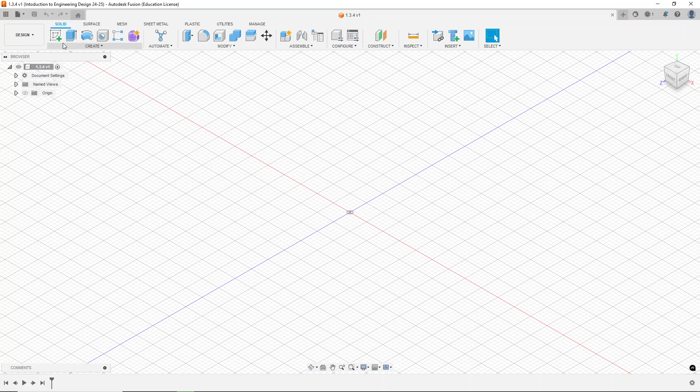So we're going to create a sketch. We're going to put this in the bottom plane, so the horizontal plane, and we're going to create a rectangle. There are three types of rectangle tool: the 2-point rectangle, where you pick the opposing points; the 3-point, where you pick all 3 points and then it builds a rectangle around that; or a center point rectangle. That's the one we're going to use today.

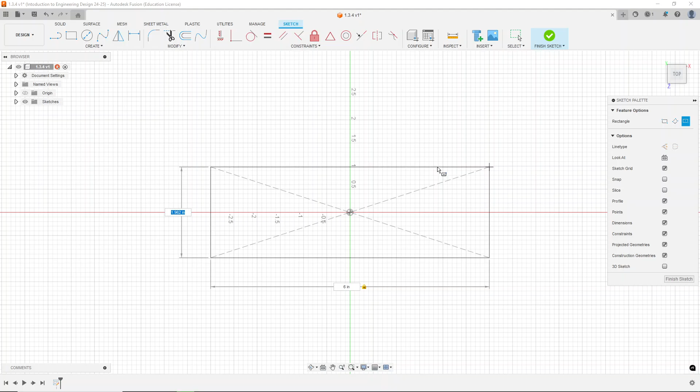So we're going to put the center point of our rectangle right on the origin, because that will lock down the rectangle. That's usually the best practice: you want your geometry to be touching the origin in some way, so it has a reference point. When you first start a sketch, there's only one locked-down reference point, and that is the origin, so we're going to make sure we use that. Your rectangle should be 6 inches wide and 4 inches tall. We can hit enter. Now we have a rectangle.

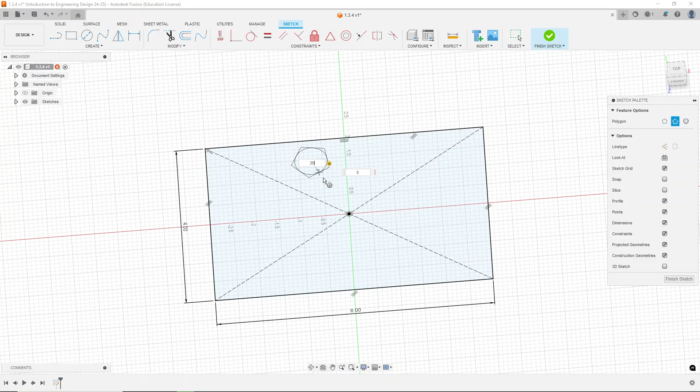We're going to add a few other polygons. So we're going to start with a circumscribed polygon. We've used this before with our hexagons from the last project, but now we're going to make some different versions. To begin with, we're going to make a pentagon. Remember that trick, hitting tab to go back and forth between these windows. We're going to make a pentagon that has a radius of 0.35 inches. So 5 sides at 0.35. We're going to create that pentagon.

Just create it somewhere in this top region, because later we're going to make it vertically constrained to this center point, so we want to make sure it stays up there. If we put that pentagon over here on the side, it would make it a horizontal constraint. So we'll just make sure it's over there for now. Next, we're going to create a polygon that is inscribed. We'll put that over here in the top right corner. We're going to give that a radius of 0.25, and we're going to let it keep 6 sides because we want to keep it a hexagon.

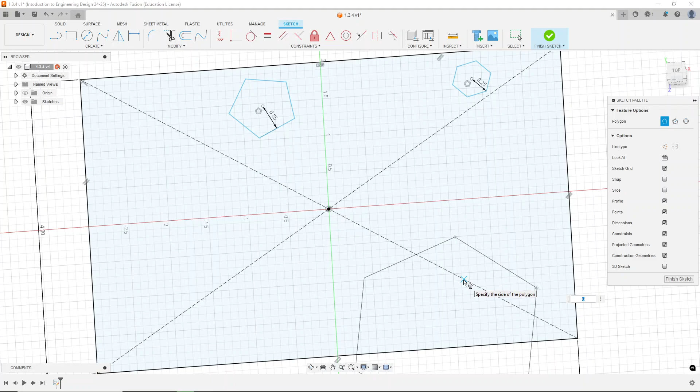And then finally, we're going to add an edge polygon. So we're going to make a triangle. This tool looks a bit different because we're starting with a line. We're going to get a line that is 1.25 inches long, hit enter, and all we've done is create a line. But as soon as we move our mouse cursor away, it starts to build a polygon and asks us how many sides. So I'm going to hit the number 3. That gives us a triangle. This is an equilateral triangle, which just means all 3 sides are the same length. So we have our 3 polygons and our rectangle.

So now we're going to start constraining them to put them where we want. If you notice, my mouse has a little icon on the bottom right because it still wants to make polygons. So I'm going to hit escape to get out of that, and now I can start adding constraints. I want the horizontal/vertical constraint, which is up here. I'm going to hit the center point of my pentagon and the center point of the rectangle. Now that pentagon is locked so that it is exactly vertical of the center point of the rectangle. Next, I'm going to add a horizontal constraint on one of these lines. So now this line must stay horizontal.

And then I'm going to hit the letter D to add a dimension, or you can go over to create and hit sketch dimension. I'm going to grab that horizontal line I just constrained, and I'm going to grab the center point of the rectangle, and pull it over here to the side. Now I want this to be 0.5 inches. That means this horizontal piece of the pentagon must be 0.5 inches away from the center of this rectangle.

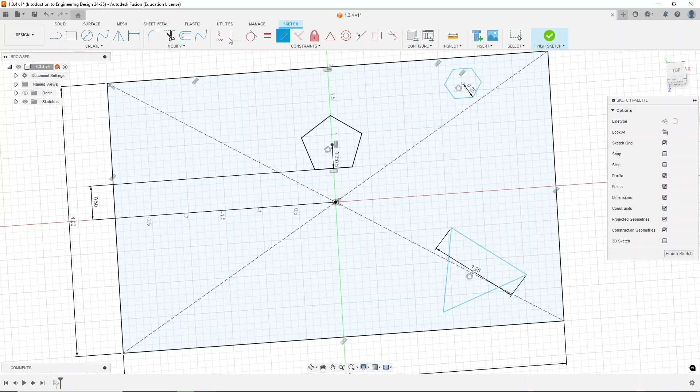Now to start constraining the hexagon, we're going to start with a parallel constraint. We're going to take one of these sides and make it parallel to the top edge or the bottom edge of the rectangle, the 6-inch length. So now that side is parallel with the 6-inch side of the rectangle. We're going to add a coincident constraint. We're going to make the center point of this hexagon coincident with this line.

And now we're going to add, by hitting D, another constraint from the center point of that hexagon to this edge. And we're going to say this needs to be 0.5 inches as well. So now that hexagon gets pulled up into the side.

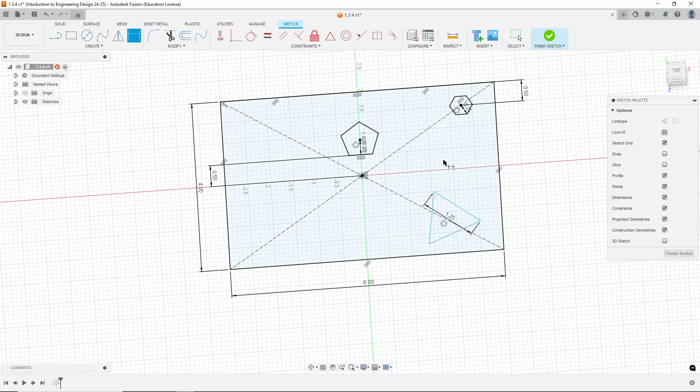Finally, we're going to constrain this triangle. So we're going to add a coincident constraint at the tip. Just be careful, make sure you get that little white dot. So we pick the tip of this triangle and then the tip of the rectangle. So those are now coincident. And then we're also going to add a coincident constraint with the center of the triangle and this dotted line.

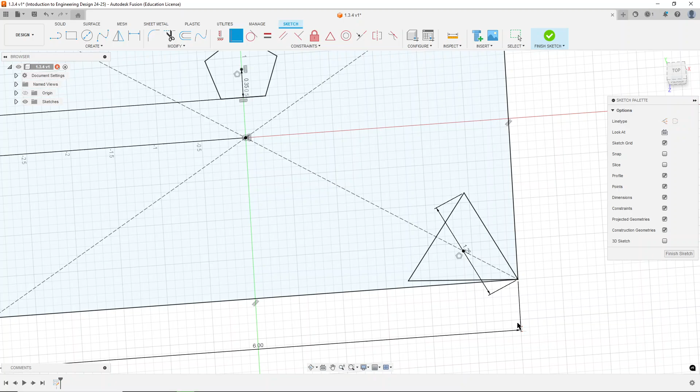So now looking at this sketch, you should get in the habit of looking for these black lines, because this tells you that your sketch is fully constrained, which just means if I hit escape to get out of my tools, if I try to drag any of these lines, they're staying where they should be, which is good. So when I start to mess with other numbers later on, it's not going to affect the placement of these objects.

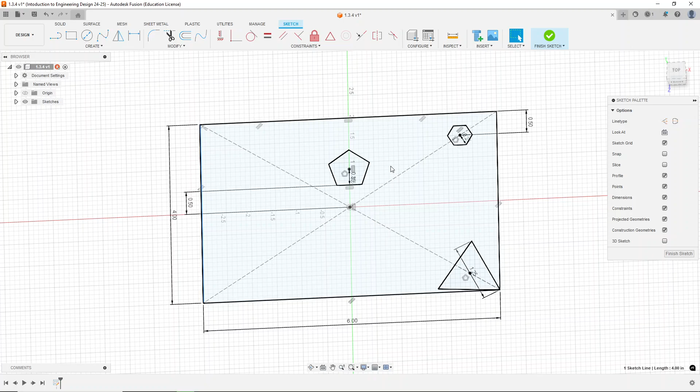So continuing on, we're going to start adding some more patterns. We're going to use some new tools. So some of those tools, if we go here to this create section, we have circular patterns and we have rectangular patterns. So to begin with, we're going to create a circular pattern of our pentagon. So we hit the circular pattern tool, and now we get this new palette up here. We're selecting our object, so we're going to drag and drop over all of our pentagon.

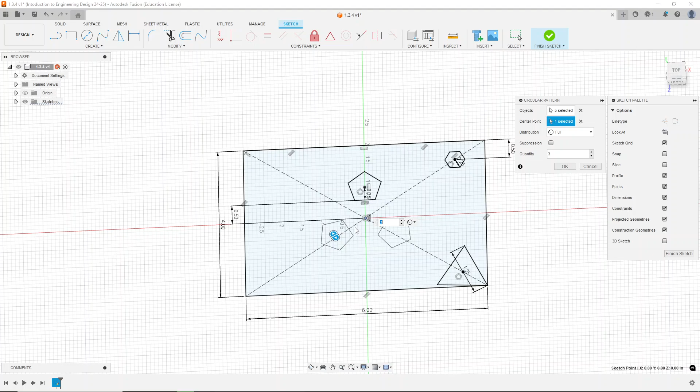Alternatively, I could go through and just click each of the 5 lines of our pentagon. After I do that, I'm going to hit over here. So now I get to select the center point of my pattern. So I want it to be the center point of this rectangle. So it automatically gives us a pattern with 3 pentagons. I want 5 pentagons though. So once we do that, hit OK. Now we have 5 pentagons that have rotated around that center point of our rectangle.

Next, we're going to create a rectangular pattern. I'm going to select our hexagon, and then we get a couple different numbers we can put in. We're going to go from extent to spacing, and rather than selecting our directions, right now we have these 2 arrows. If we start to drag either of these arrows, you can see how we start to space out some additional hexagons. We're going to call this at -0.7. That looks like a good number, and we can leave it at 3.

Now, if we grab this other arrow and drag it down, we start to get more hexagons. I don't quite want 3. I want to just do 2 rows of hexagons. So now we have 6 hexagons in this position. And if you look at the window over here with our rectangular pattern palette, we have those directions, and we can say symmetric, and that would split it up evenly on both sides. We're going to stick with one direction though.

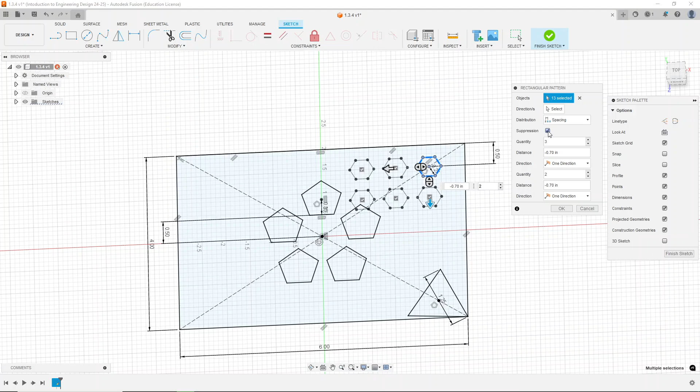So we have our set down here, quantity, distance, and direction. Those are our hexagons going down. And then our quantity, distance, and direction, these are our hexagons going to the left. If you look though, one of these hexagons is overlapping with the pentagon, and I don't want that. So I'm going to hit suppression, and then we get these little check boxes that pop up on all these hexagons. I'm going to click this one, and that means that hexagon is not going to be created in this pattern. So now I can hit OK. And now I've created 5 hexagons in this pattern.

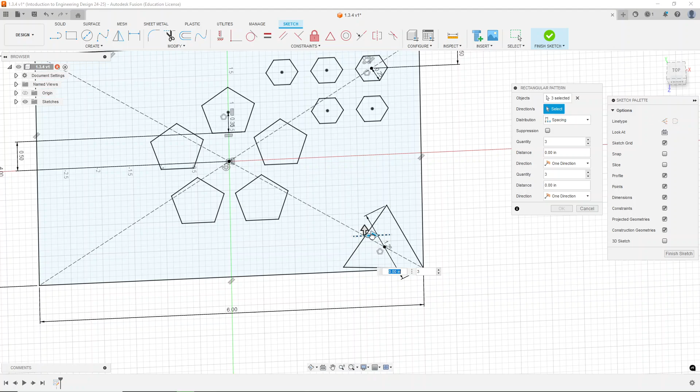Finally, I'm going to create another rectangular pattern for this triangle. So I'm going to select all 3 sides of the triangle. You see object selected, I have 3, each of the 3 sides. For directions, rather than doing the left and up like we just did, I'm going to choose this line, and I'll get rid of that direction. So now we're going to go along this line. I want 7 triangles, and let's just bring these down enough.

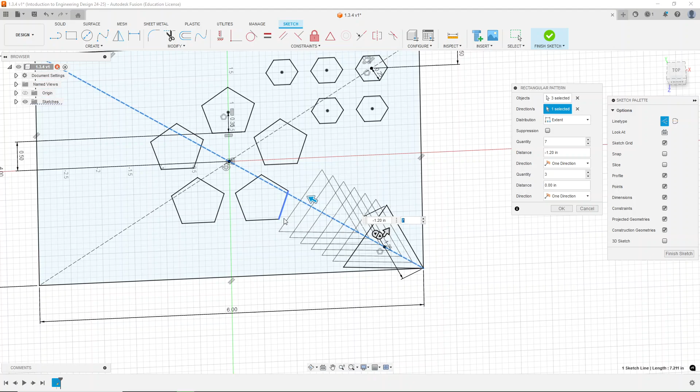We'll go to extent. So now the difference between extent and spacing, for extent, I'm just telling it how far out the triangles are going to go, and then it's going to space out however many I tell it to put in there. If I go to spacing, I'm telling it how much distance should be between each of these triangles. So we'll go with extent for this one, and I'm just going to pull it back just enough so that it doesn't overlap with that pentagon we have in the middle. So let's do -1.20 inches for those 7 triangles. So now we have our patterns up here, and we're going to finish our sketch at this point.

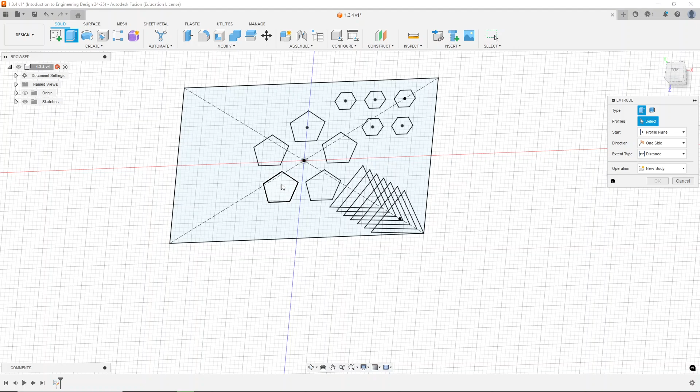From here, with our sketch up, we're going to create an extrusion. There are a lot of different sketches we can choose from, but first we're going to choose the rectangular base in general. We're going to grab that, and then we're going to grab a few sections of these triangles. So I think we take this first triangle, and then we're going to alternate with these others. So we create this kind of arrow-like shape.

So now we have these 3 cutouts that remain from our triangles, along with our 5 hexagons and our 5 pentagons. So let's extrude that. Let's go 0.2 inches. Seems like an appropriate depth.

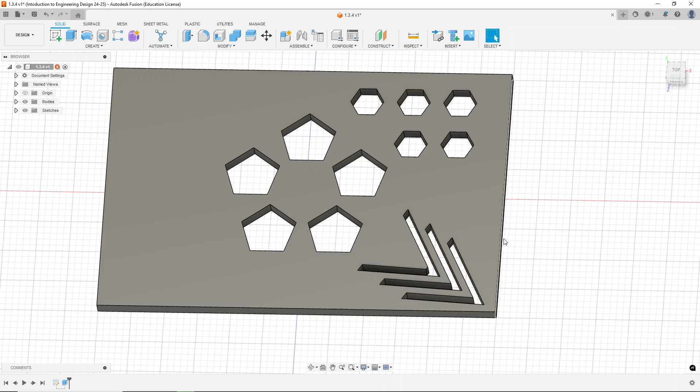And just like before, anytime you use a sketch to create an extrusion, your sketch disappears. But if we hit this drop-down arrow, we can hit the eyeball, and then our sketch comes back underneath, and we can use that to build on later if we need to. For our purposes, though, we're going to create a new sketch, so I can hide that sketch since we don't want it to confuse our geometry right now.

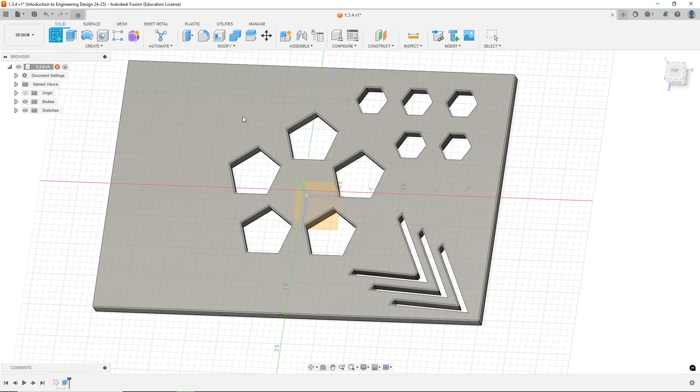We're going to create a sketch on the top surface of this thing we just created. So don't choose the orange squares right now. We want to choose the surface of this object we just made, because when we do that, we get the lines that are in this object as part of our sketch geometry.

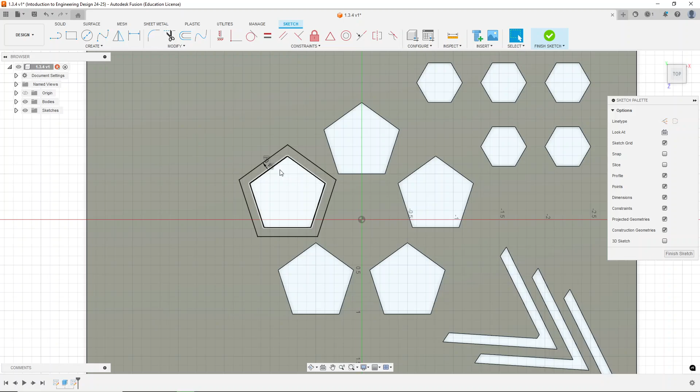So now we're going to create an offset and choose 3 pentagons. I don't care which 3 you choose. I'm going to start with this left one, and I'm going to create an offset that is negative 0.1 inches. You see it creates a line that is just offset from the hexagon or the pentagon that already exists. So I'll do another one over here, negative 0.1, and I'll do this one down here, negative 0.1.

Now looking at our pentagons and our offsets, some of these interact with one another, and we don't want that to happen. So now I'm going to go to modify, and we have this fillet command. So we're going to create some fillets. And if I put my mouse cursor right on the tip of a point where I get that white dot, it gives me the projected fillet. If I choose a line, it's going to wait for me to pick the other line to fillet. So any 2 connected lines, you can create a fillet, or you can just choose the point that you're wanting to fillet. So I'm going to choose this point.

I'm going to give it a 0.2 inch fillet. I'm going to hit enter, and I'm going to continue doing that for all of the points on all 3 of my offsets. So fillet tool, pick the point, 0.2 is our radius for our fillet, and then repeat for each of these 15 points.

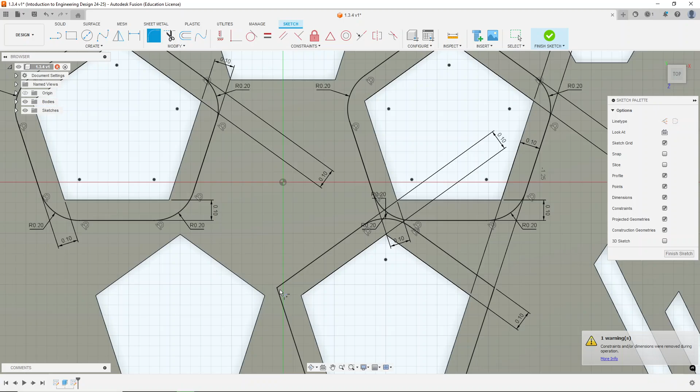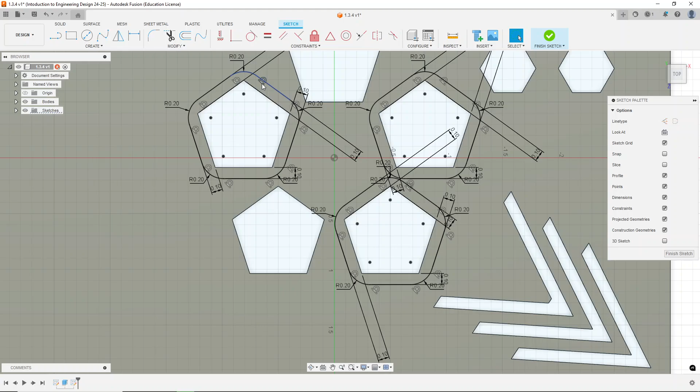Something that you can do as well, if you just right click, there's the repeat fillet button. So rather than going to find it each time, you could do that. So if I right click, repeat fillet, I can grab that fillet tool right away. Perfect. So now I have fillets on all of my 15 corners of the pentagons I just created, and I no longer have them intersecting. That was really tedious.

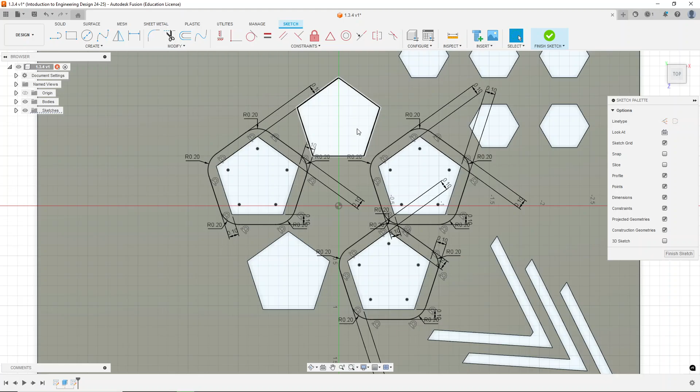One way we could have made this happen that might have been a little bit easier is if we just did one of these pentagons, and then we could have created a circular pattern to bring them around, and we could have suppressed the ones we didn't like. So just know in Fusion, there's always multiple ways to get things done. The way I'm showing you doesn't have to be the best or only way. It's just how you're going to get there. In this case, this is probably the longer route.

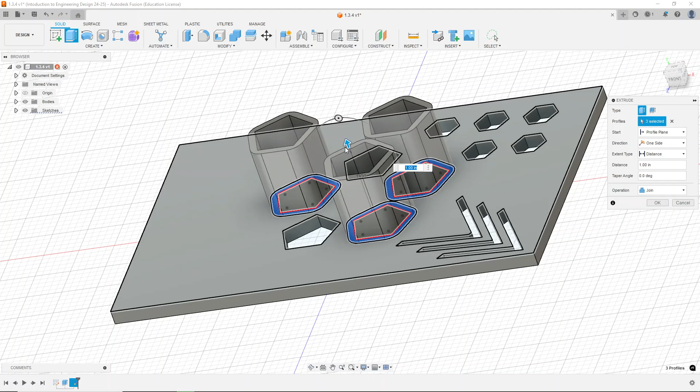But at this point, we can finish our sketch. And now we're going to extrude these regions we have just created. We're going to pull those up. Let's pull them up 1 inch, hit enter, and now we have this odd shape that we've just created for our first part of 1, 3, 4.

To continue for the second part of 1, 3, 4, I'm going to open up my bodies. I'm going to hide this body so we don't have to look at it for the next piece we're going to build in this section.

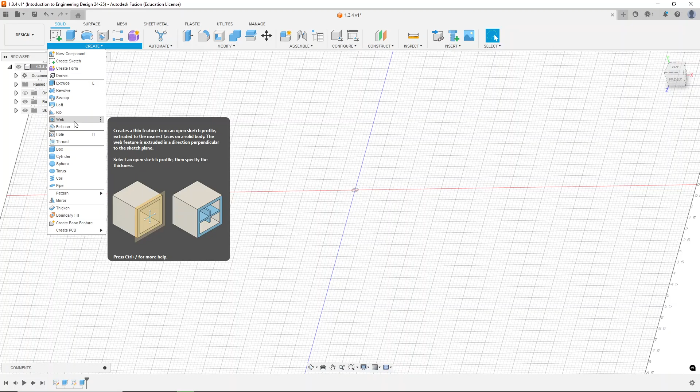In 3D printing, an additive manufacturing process, we're not concerned as much with it leaving a mold, so we have different things we would be worried about. So we'll talk more about that as we go through this process. But for now, we'll go back into Fusion. We are going to start by creating a polygon. Oh, nope, sorry, I guess we need to start with the sketch first. So we'll do that again on the horizontal plane.

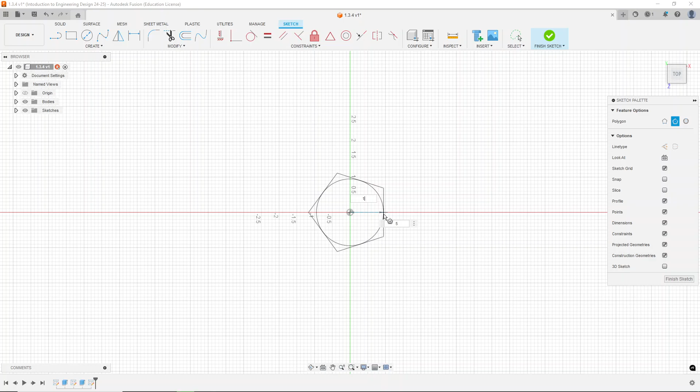We're going to create our polygon, and we want a circumscribed polygon. So we're going to put it at the origin again, hit tab. I want this to be 5 sides because we're making that 5-sided tool holder. And then I think this was about 2 inches in diameter, so I'm going to give it a 1-inch radius and hit enter. So now this is going to be our base. So we'll finish our sketch.

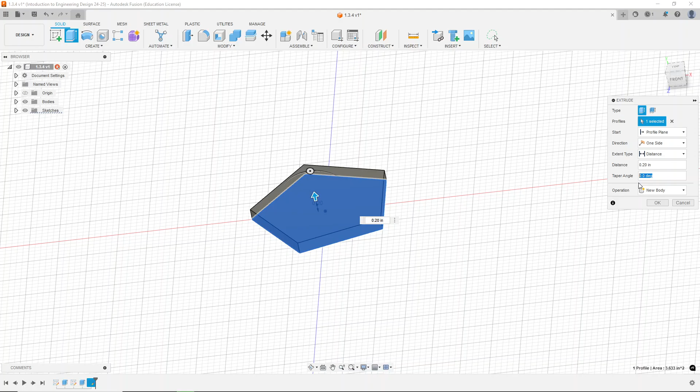We're going to hit extrude. We're going to pull that up. Let's do 0.2 inches. And then we have this thing called a taper angle. So we could do this all right now by introducing a taper angle. So if we put this in at -45, you can see it tapers that object inward. So we start to build in. If we leave that at 0 though, it would just make our regular pentagon.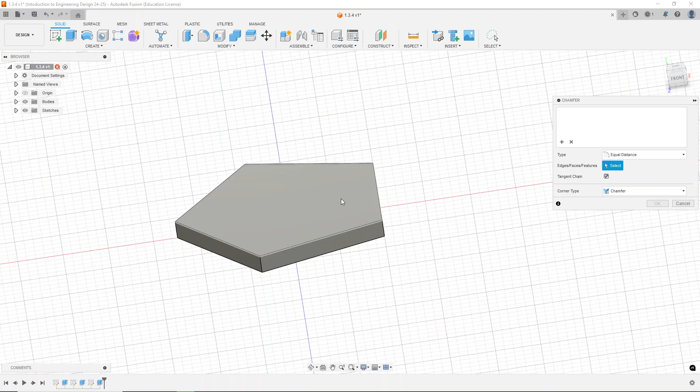So you could just do the -45 and hit enter, but I'll show you a way you can do that without. Again, there's multiple ways to get things done. So I could just make my pentagon shape, and I could hit chamfer, hit this top surface, and then now I have a distance of 0.2 inches, and I would get the same object in the end. Either way you do it, you're going to get the same object. It's just about how you're using the tools or what pathway you want to take.

Now from here, I'm going to extrude again without making a sketch, and I'm just going to choose this profile, and we're going to pull it up some distance that makes sense. So in order to help me make sense of how tall this should be, I'm going to take a pause. I'm going to bring in a canvas so we can reference. So I brought a canvas in, which is the picture from our notes, but you can also just reference with your iPad if you need to.

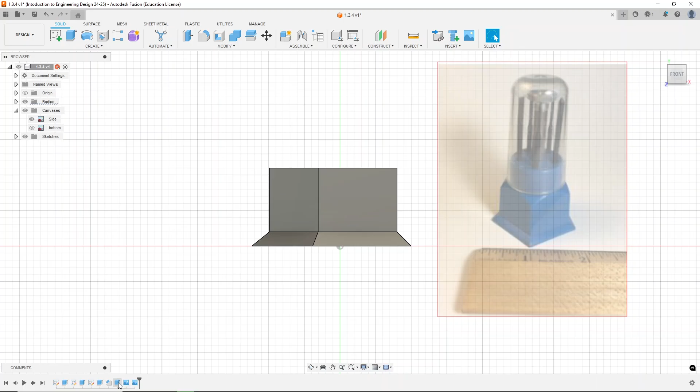But I messed up my second extrusion, so I'm going to go here and click that, right click and hit edit feature. So this is where you should be at. We're bringing up that section. I think 0.9 is actually a good height, but we need to add a taper to this as well. So we're going to say -5. That seems a bit steep, so maybe a -2 degree taper. So a negative taper just means it's smaller at the top.

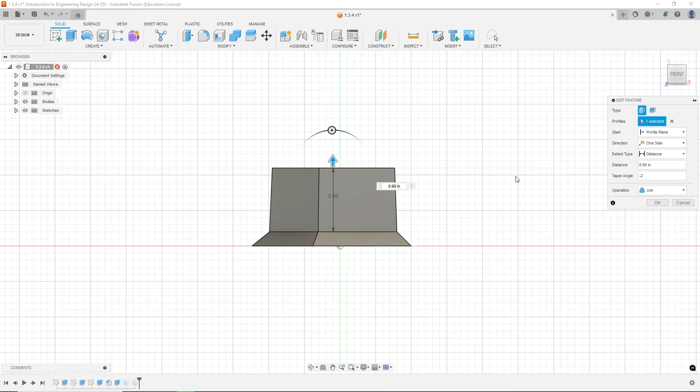I'm at OK. So now we have this taper going upward. Again, because it's injection molded, that just means everything needs to be tapered to the top so they can leave the mold easily. So now we have this part at the top, and we're trying to get it to eventually become a circle. So we have a 5-sided shape, and we're trying to turn it into a circle. That can be really complicated if we're trying to do it by hand, but luckily there's some tools to make that easy.

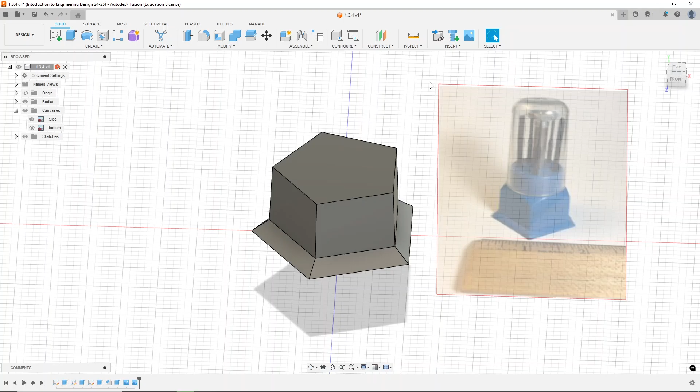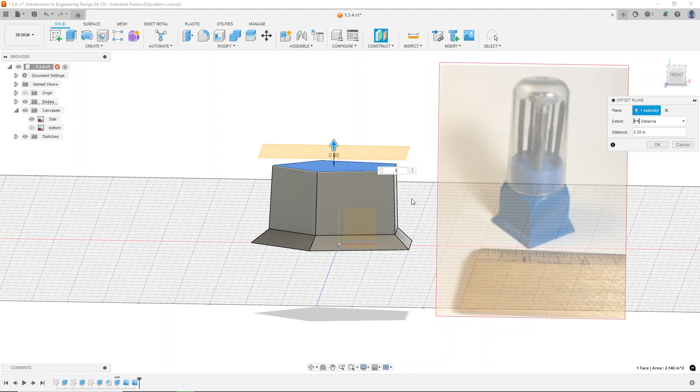So the first thing we're going to do is construct an offset plane. So an offset plane just gives us a place to sketch that is offset from some other place on the project that we would sketch from. So for our purposes, since the circle base is kind of at this point, we're just going to bring this up to about where we think the circle base should maybe begin. So maybe 0.2 inches up. And we'll hit enter. And now we're going to create a new sketch on this new plane that we have.

So if we look, our sketch is kind of floating above where our object is. So if I were to try to draw some things, they wouldn't be able to connect to these lines very well. So I'm going to hit the letter P, which brings up my project window. I'm going to select this top surface, the pentagon, and hit OK.

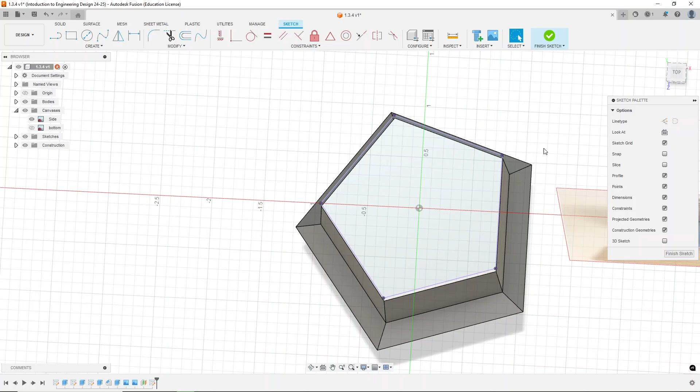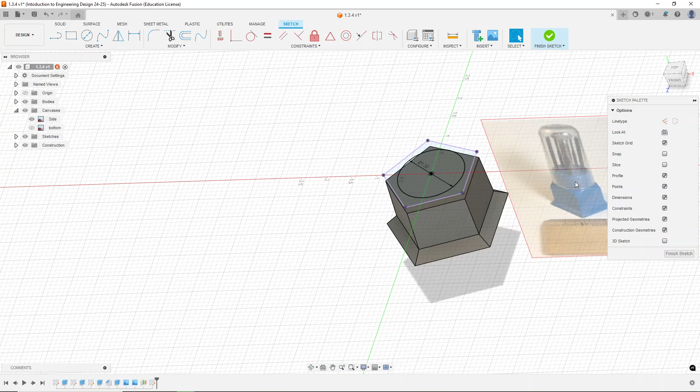So now the points of my pentagon are available to me along with the center point, which is really important. So I'm going to create a circle. This is a center point circle, so I'm just giving it a diameter. And this just needs to be some diameter smaller than whatever my pentagon is. So I'm going to say maybe 1.3. And that seems like an appropriate relationship to what's here. So it's just slightly smaller than what our pentagon was. So now we have this circle as a sketch.

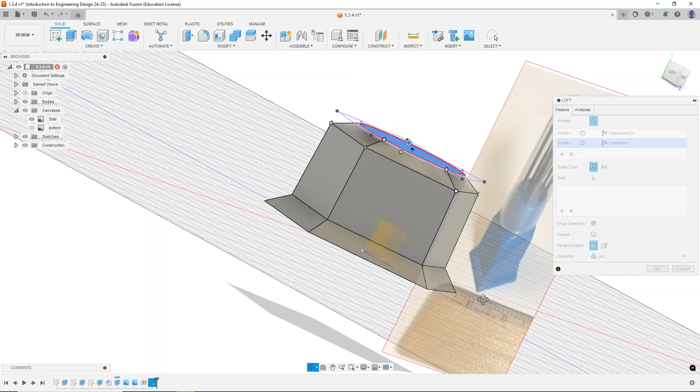We're going to finish our sketch, and we're going to do create, loft, and if we pick our pentagon surface and then pick our circle surface, it will just mathematically connect those. So we have this thing that goes from a pentagon to a circle, and now we can hit OK. So now we have that transition of shape.

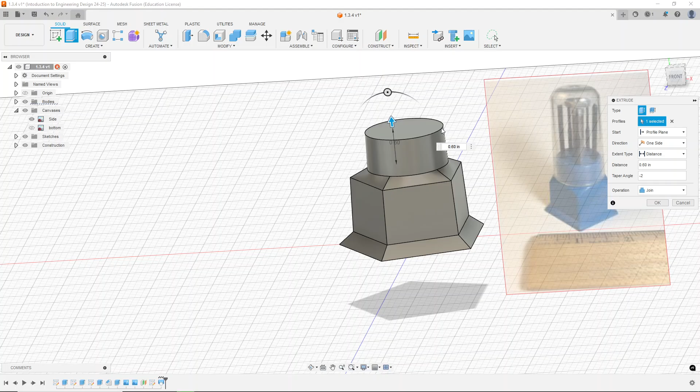We're going to do another extrusion coming up from here for this last little chunk that is up. So I think that might be 0.6 inches, seems good. And again, since this is something we're preparing for injection molding, we would add that negative draft in here, that taper angle, to have it be able to eject easily. And we're going to hit OK. So we kind of have the base ready.

So there are 5 holes for drill bits. So we're going to create a sketch up at the top. And we are going to define some position where we think a hole should be. So I'm going to turn this into a construction line going from the center. I'm going to hit tab and lock this to 90 degrees. And I could position where I want that hole to be using this line.

Alternatively, similar to what we did last time, I can just create a circle. I don't want this to be a construction line this time. I'm going to say those are, let's say, 0.18 inch diameter drill bits. In reality, we would measure the size of that. I'm going to enter. So now I have this circle

positioned here. I'm going to constrain it vertically with the center of this circle. And I'm going to hit the letter D so I can add a dimension between those two center points over here. And I'm going to say that should be 0.35. That doesn't look quite right. Maybe 0.4. Maybe I'll like that better.

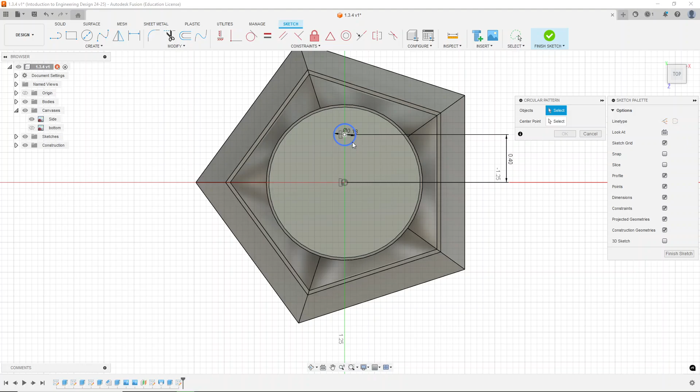Now I'm going to create my pattern. This would be a circular pattern. I pick my circle. Then I'm going to go select the center point of this main circle. And I want there to be 5 of these holes. Hit OK. Now I have my 5 circles. I can finish my sketch. I'm going to extrude each of these. And we will go down. Sure, let's go down 1/2 inch and hit enter. So now we have 5 holes down 1/2 inch.

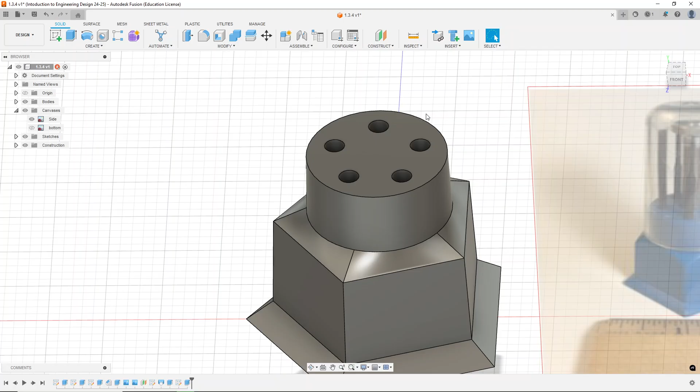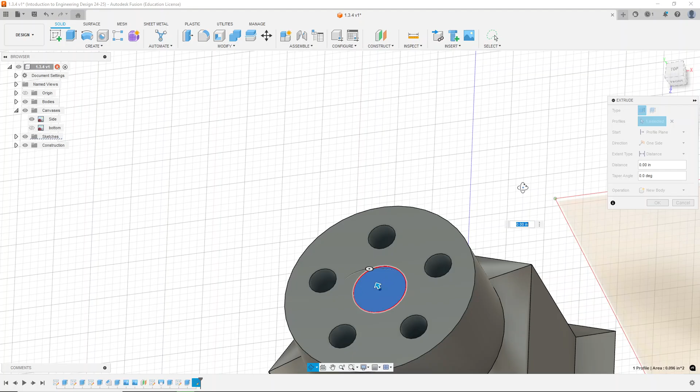Additionally, though, this object had a hole in the middle, so we're going to add that feature as well. Although I think that feature was explicitly just for injection molding, so that it could be punched out of the machine. We're going to add it anyway. So we're just going to add a larger circle. This one can be 0.35. That seems appropriate. Hit finish. And we're going to extrude that circle down as well. We'll do a negative 0.5 for that one as well. So now we have that hole going down.

Then finally, we'll add a fillet to this top outer edge. Just something really slight. So maybe 0.025. Just to break that hard corner. So now we have our base.

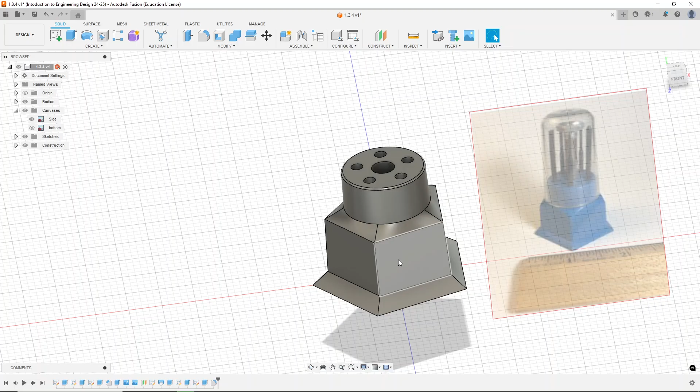So something else with injection molding, often they are very hollow parts, so it's just like the shell of whatever object. Our object, though, in Fusion is solid. So for a 3D printer, that would be fine because 3D printers don't make things solid. They actually have a structure on the inside that is mostly hollow.

For our purposes for this model, though, we're going to turn it into something that looks like it was injection molded. So if we go to Modify, it's up here at the top, but we can also go down and find it right here, the shell command, and this shows you what that looks like. It just turns some solid body into a shell. So if we do that, picking our faces or bodies, the face we click is the one that's typically going to be open.

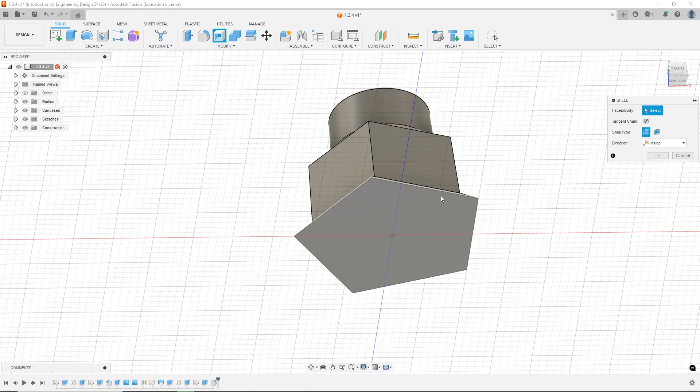So if I click from the bottom, we're going to go inside. We want a shell thickness. Let's make this 0.1 inches maybe. That seems a bit thick. So maybe 0.06 inches. So now it's going to create a shell for all the surfaces, but it's going to get rid of this bottom face for us.

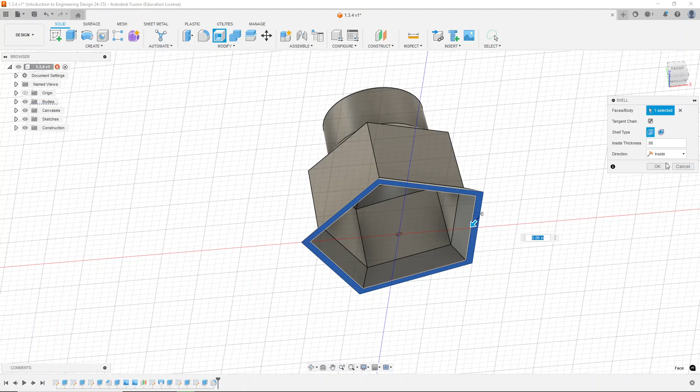Since we're going in the inside. If we went outside, then it would create a shell going in the outward direction. So I can show you that. If I go 0.2, it builds up on top of what we had just made, which isn't what we want in this case. So we want this to go inside, our 0.06. So it's just that outer line of our body determines what direction the shell is going to go.

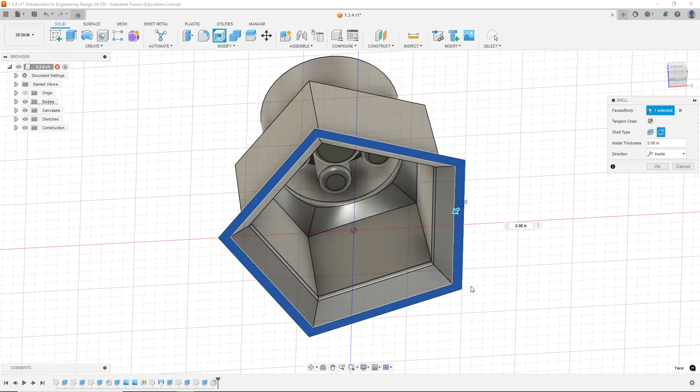So we could also make this a round shell, which just rounds off all the corners on the inside, or we can keep the angles sharp. For our purposes now, it doesn't particularly matter, but just know that's a tool if you ever need it. So we're going to hit OK. So now we have our shelled out screwdriver bit holder.

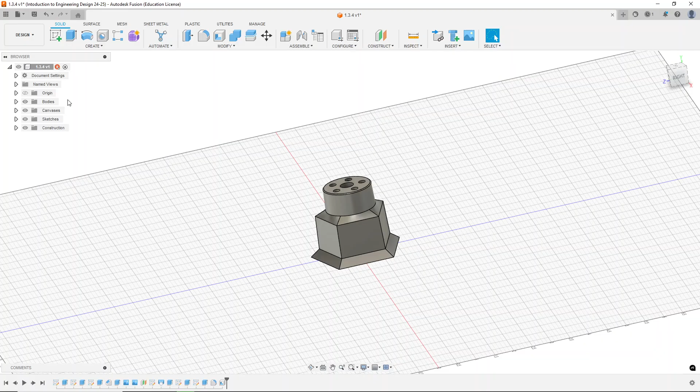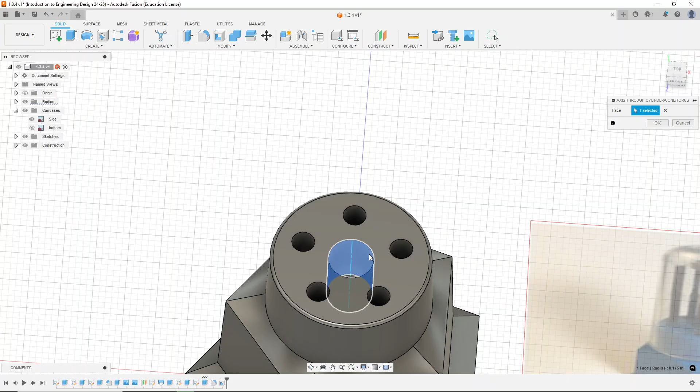Something else we're going to add to this, if we pull up that canvas again, it has a kind of dome protecting it. So we're going to do one more feature. So if I go back to construct, I'm going to do an axis through a center. So I'm going to pick this center hole. And now it gives me that dotted line, that center line through the center of it, and I'm going to hit OK. Then I'm going to construct a plane at an angle. I'm going to hit that line.

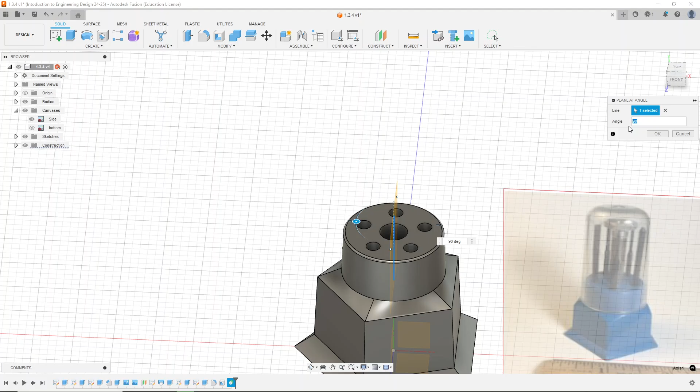So now it's giving me a new sketch plane that I could use that is exactly through the center of that circle. I could also change that angle to 90 or 30 degrees or whatever angle I want. I'm just going to leave it at 0 for now. So now I have this sketch plane. So I'm going to create a new sketch on that plane.

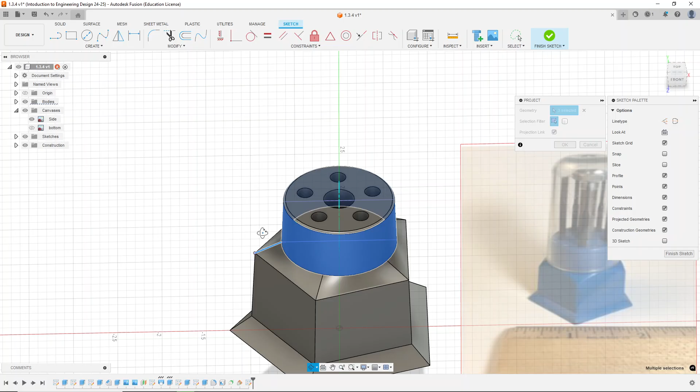Now that I'm here, I'm going to hit project. I'm going to hit the surface of this taper, and I'm also going to hit the geometry here. So since I picked the sketch plane, that would exactly show me all the way over to this edge, and then I can also do the same thing over here. So I get the shortest possible edge and I get the longest possible edge in that slice. So I'm going to project all those pieces. So now I can kind of see where this lid would be resting once it sits down.

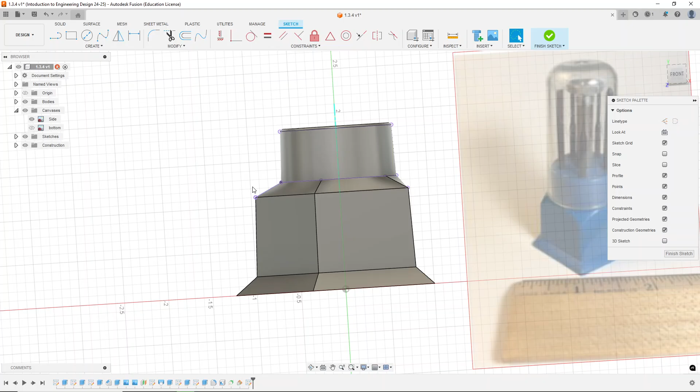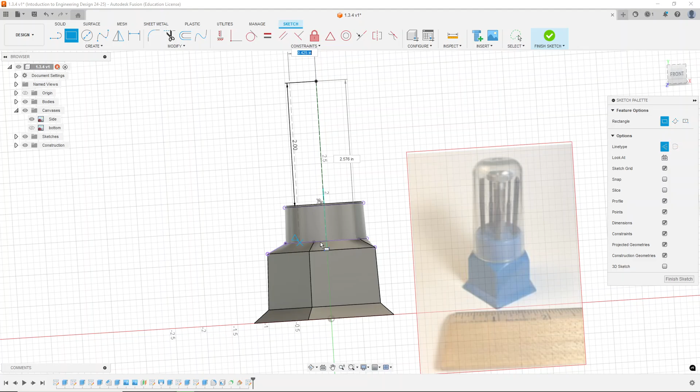So what we're going to do, we're going to start with a construction line. We're going to find that center point. We're going to go up, let's go up 2 inches. That seems nice. From this point, we're going to do a rectangle. We'll go over, let's turn this off of construction. We'll come down onto this side.

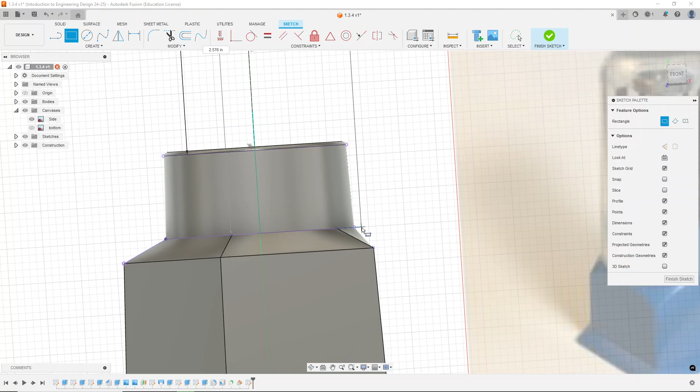But if we line it up with this point, if we imagine if we were turning this into the piece that was going to be the lid, if it went all the way down here, it would interfere, it would touch that kind of part of the base. So we're going to stick it at this point. So to get that to happen, if I go to the point and get that blue square, and then I kind of slide over, I get a dotted line that's hard to see. And if I line up both points, I could get them to give me both constraints. But if it doesn't, I'll just go right here for now.

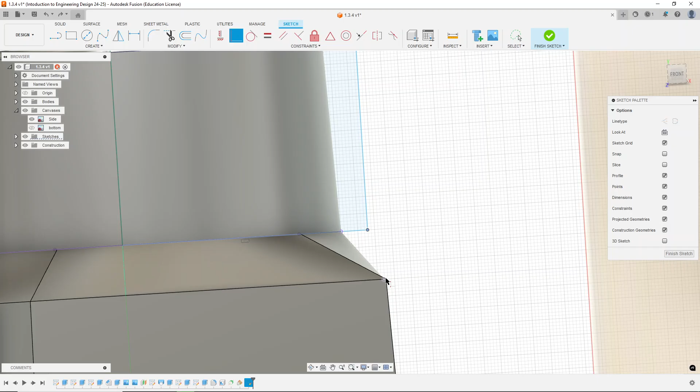Then I can add that coincident and have those be coincident with one another, but that would bring me all the way down. Or if I go backwards, I could make them collinear lines between these two lines. What might work best though, or what I could show you to have a lid that would fit perfect, is if we go all the way down, and to show you a new tool. So now that is coincident, so it is going all the way down to this part of the base, which is the thinnest part. So now we're going to create another rectangle coming from this point.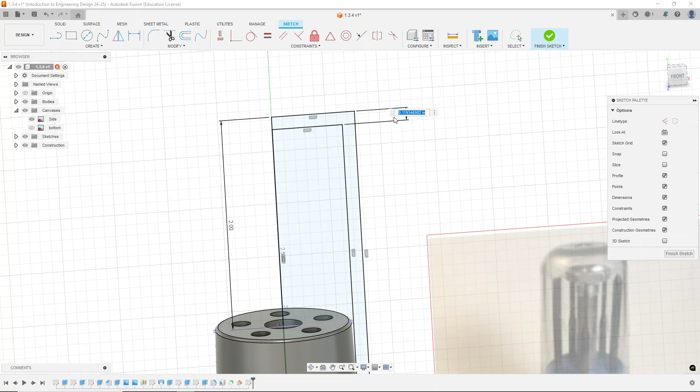We're going to go up some distance and then touch back to our center line. Hit escape. Add a dimension between these two lines. That will be some number. We'll just do 0.1 for now. Let's see, what is the distance between these two? So I can see the distance between the rectangles already built was 0.119, and that's based on the distance between these 2 points.

I can find that, by the way, if you go up here to the inspect tool. That lets me pick any 2 points and it'll tell me the distance between them. So I'm going to mirror that on the top so that it's the same thickness. So I'm going to go 0.119, hit enter. So now I have this consistent thickness that I've built up on this rectangle. So I'm going to finish my sketch, and I have this profile that I can rotate around now.

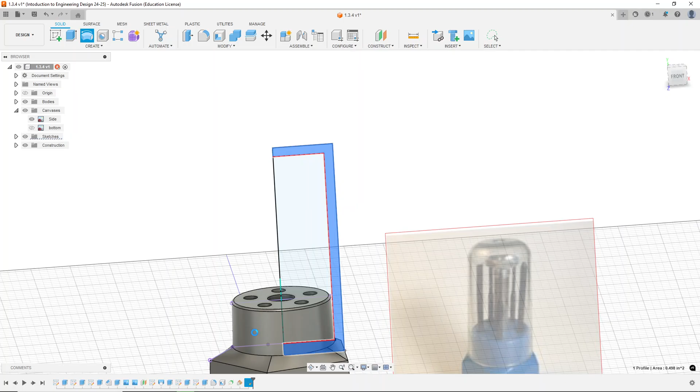So if I go to the revolve tool, I'm going to pick that profile. Ooh, and if you notice, it's cutting into the base right now, which isn't ideal. So I'm going to hit cancel, and I can go through and right click my sketch, hit edit sketch, and I'm just going to add a line continuing down from here. So now it connects the smaller rectangle with that larger rectangle, and now I can hit finish sketch.

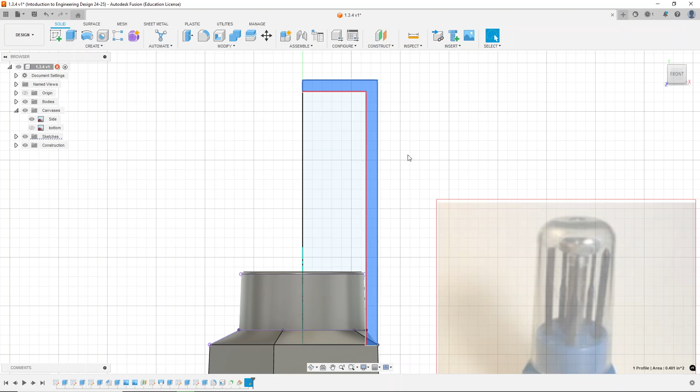And now when I select that profile, it just gives me that edge going straight down. And we're going to revolve it around the center axis that we just created. You see right now it tries to cut because it was intersecting. We don't want it to cut though. So for our operation, we're going to say new body. You can see it creates this solid shell around our object. We're going to hit OK. So it created that new body.

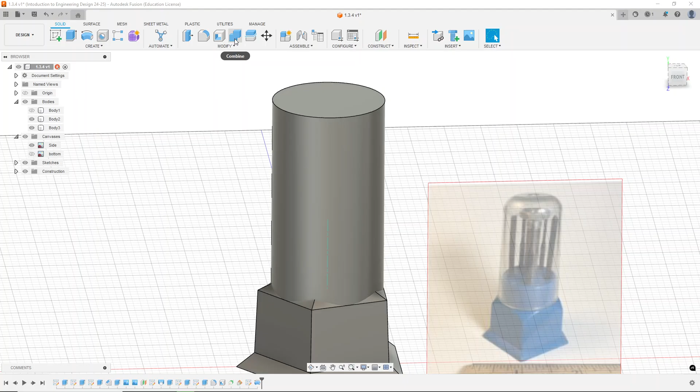And the tool we're going to use now, if we open up our bodies, we have our hidden body that was our rectangular piece. We have our base, and then we have the lid. If we go to combine up here and modify, we have our target body, which is the thing we want to change if we select body 3. And then our tool bodies are the things we're using to change it if we select body 2.

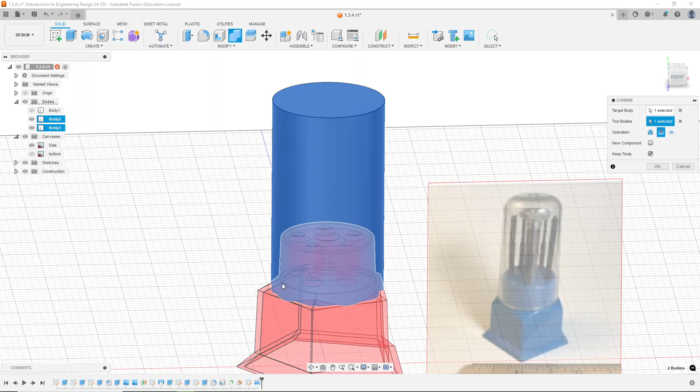And the operation, we don't want them to join to become one piece. We want them to cut. So we want the tool body, the base, to cut away from the lid. And then we're going to hit keep tools because after this is done, we don't want our base to go away. We want it to stay around. So we're going to hit OK. So now it looks like nothing has happened.

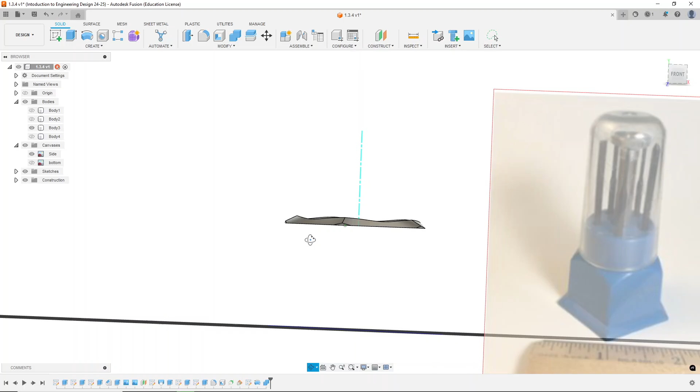But if I hide our bodies, we can see the lid now has this contour to it that would fit perfectly with the base we had just made. It looks like we also have the inner ring that got cut off of that. So this is body 3 now. It will probably be the same body for yours.

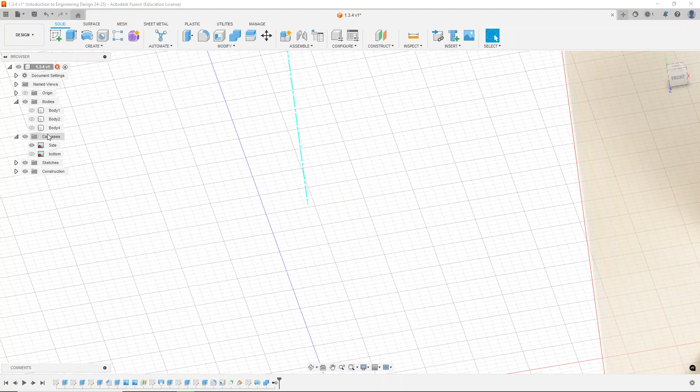But if this ever happens, if there's ever a piece of something you don't want to be present, I can go over to this body, right click, don't click delete. That is a bit different in Fusion. Instead, we just want remove because this is something that gets added to the timeline, which means I can undo it later if I feel like it. So always remove, never delete. So now we have the case with a lid.

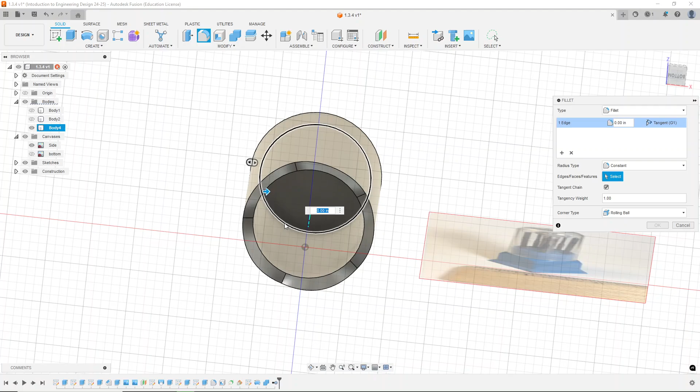Looking at the top, we can add a fillet to the outer edge. We should also add one to the lower edge or the inner edge. So I'm going to come in here, hide the base that was in our way, select that inner top corner, and select this corner. So now we have those two rings. We're going to add a fillet of 0.2, actually let's go further. 0.4 looks great. So now we have our lid and our base.

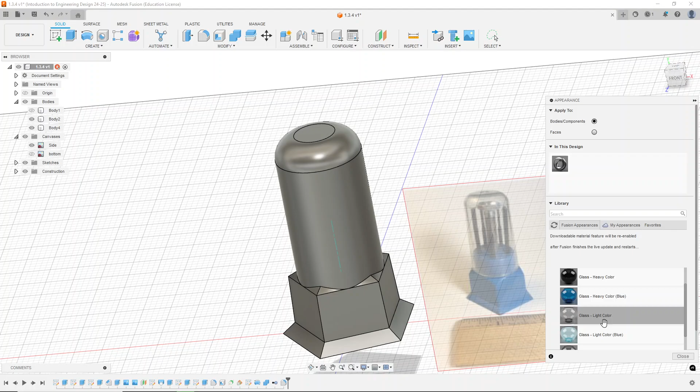So something else we can do, if we hit the letter A, we get an appearance window. So looking at this window, we have Fusion appearances. So if we click Fusion appearances, we go to glass, and I can click any of these. So I'm going to just go with a light color glass. If I click and drag that, I can drop it onto my lid, and now it turns it into a piece of glass.

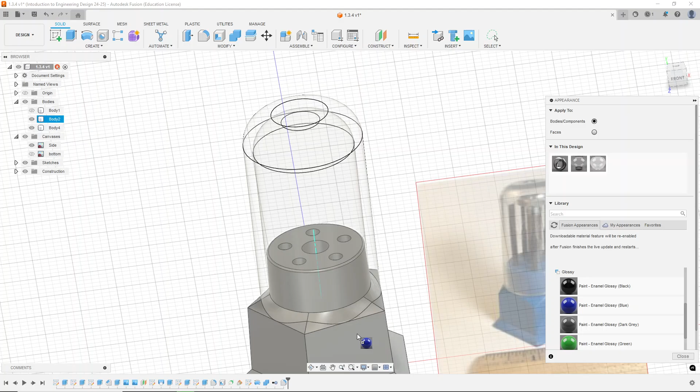I could also, I don't like that. That glass became darker than I thought. Let's do glass clear. How about that? Yeah, there we go. So I have this clear piece of glass. So I can hide those again. I can make them collapse by clicking the names. And then maybe let's go down to paint and a glossy paint, and we'll put a glossy blue on the base. So now we have painted objects, and we can change the material they're made out of as well.

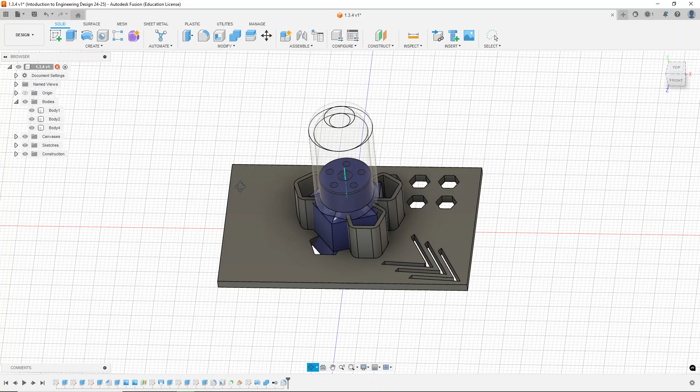Now we're done with the appearance. We can hit close, hide our sketches. So now we have our screwdriver bit holder. Unhide your original object as well. They're kind of overlapping each other.

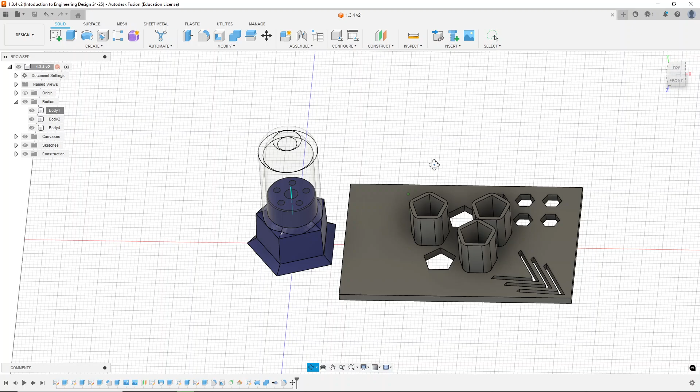So let's click object 1, our body 1, right click it, move or copy, just drag this arrow over just until they're not on top of each other anymore. Hit OK. Then at this point, save in the top left. User saved is fine. And there we go. This is all you need to do. Now we're done with 1.3.4.